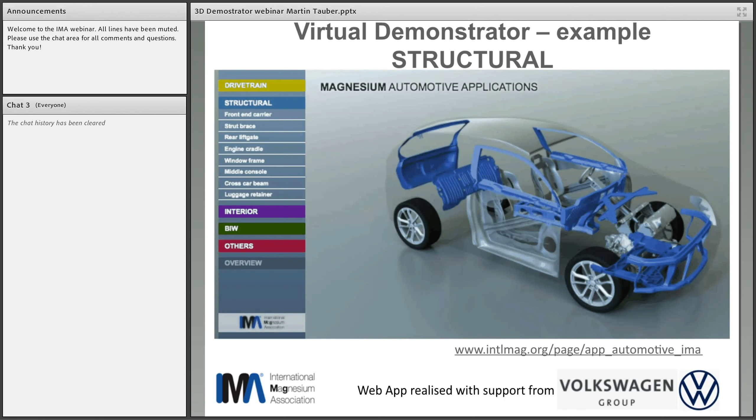And then you can click on every part, and we can show you also an overview list of these 23 selected parts, and they're also dedicated with different colors.

The second element is a part list where you see along, like the technology and also the different alloy used, the weight of the part, the weight advantage or other advantages associated with the part. You see the manufacturer, and if it's dedicated to a particular OEM and a particular model, it's also listed there.

Just want to open up also for later for the discussion, and before we conclude to the panel, a little bit of an outlook. So we all know that magnesium has significant weight advantages against aluminium, but also against advanced high-strength steel.

We currently have, according to a study from the IMA, about 4 to 5 average kilos of magnesium in a car in the European fleet. The American fleet has a little bit more average weight. In our study we calculate the magnesium alloy part plus the magnesium used as an alloying element for aluminium parts. If you split that up, that's about 3.5 kilos for the magnesium part, and around 1.5 to 2 kilograms of magnesium for the aluminium part.

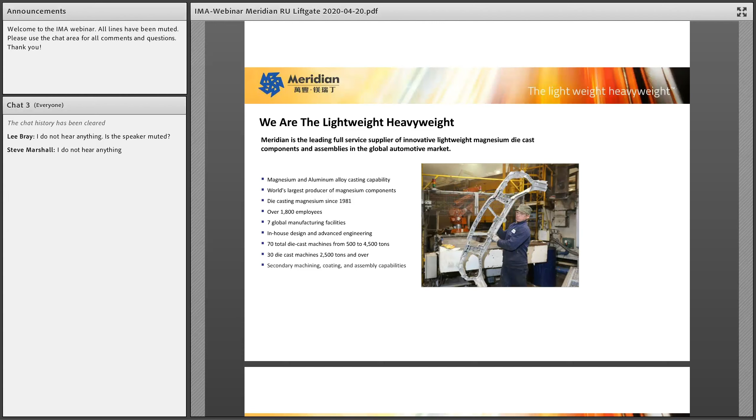As for the products we developed over the last 30 years, a rough overview: we started in 1985 with classical high-pressure die casting parts, transfer cases, then steering column components, pedal brackets, and in 1994 the first cross-car beams. Meanwhile, we're producing cross-car beams in North America, Europe, and Asia, basically globally. We have done seat structures, front of dash, transfer cases, center consoles, front end structures, and especially engine cradles, a very unique part, steering column armature, and the last picture shows a lift gate.

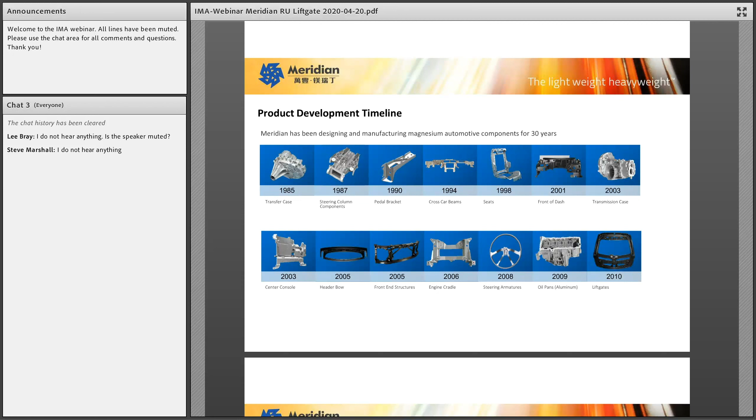We did lift gates, and I will come in more detail to the lift gates now. We developed a lift gate with Fiat Chrysler together, and I'd like to talk about the lift gate today. The vehicle is a Chrysler Pacifica, for which we developed the lift gate.

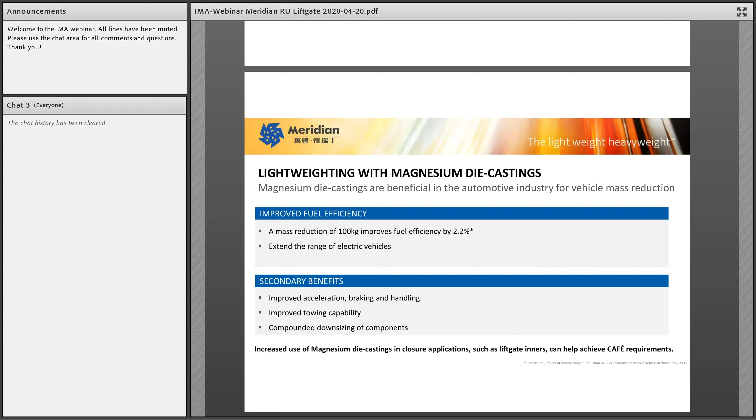A couple of advantages regarding weight saving: mainly on electric vehicles, there's range extension due to the weight reduction, and on combustion engines, fuel economy improves due to the weight reduction. We also see other effects from weight reduction, such as improved acceleration, improved braking, and a very important point, the downsizing of the number of components. I will come back to this specific point later.

Here you see the Pacifica, the Chrysler Pacifica minivan. This lift gate was developed as an aluminium and magnesium casting, so it's like a hybrid, and we saved nearly 10% against the weight saving targets we got from our customer.

The next point is a more detailed picture of the lift gate. The black part you see is the magnesium die casting, and the silver parts are the aluminium parts. In the middle area you see the wiper reinforcement, and on the outside the outer lower skin and the outer upper skin. Important for this part is the high volume production, over 250,000 vehicles a year.

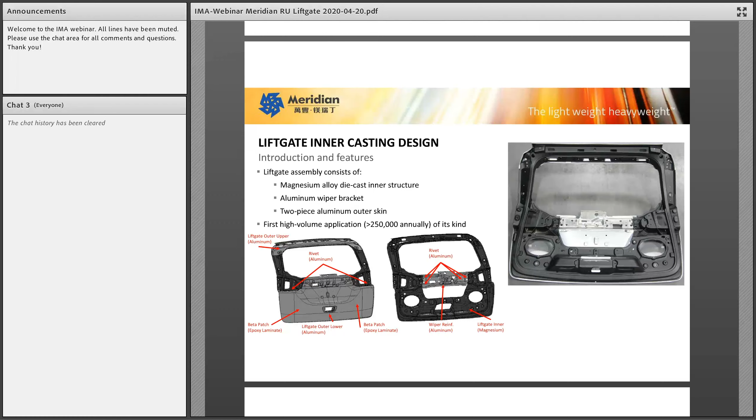On this page you can only see the magnesium die casting parts, just to get an impression of the size. It has a width of 1.4 meters and a height of 1.2 meters, a weight of 6.9 kilograms, and we are using a magnesium alloy AM60 due to the required elongation, strength, and castability. Castability is very important here due to the size of the part. The overall wall thickness is 2.3 millimeters. In smaller areas where the latches and hinges are attached, and attachment points to other components, we have a thicker wall thickness, but mainly we are working with a very thin 2.3 millimeters considering the size of the component.

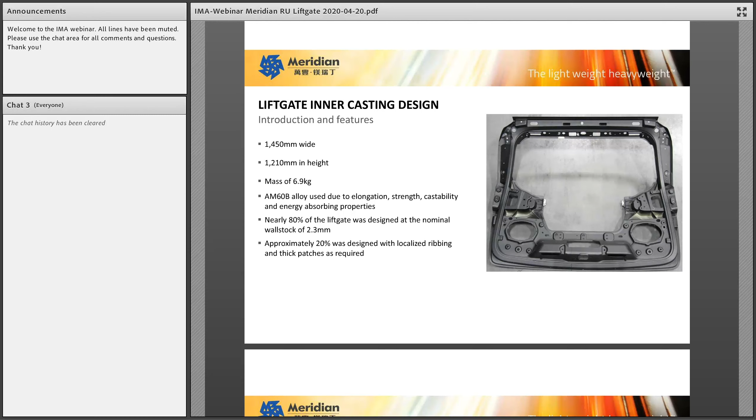On the right side you see the previous generation, which is what I mentioned at the beginning. The previous generation combined several stampings that were welded and clinched together, and we reduced this number of components to one large die casting plus the aluminum reinforcement, down from 7 in the past. There were 7 steel stampings as well as plastic parts to build up the lift gate.

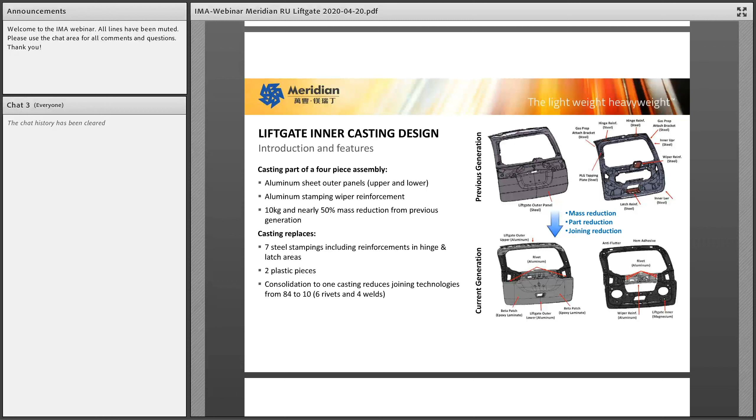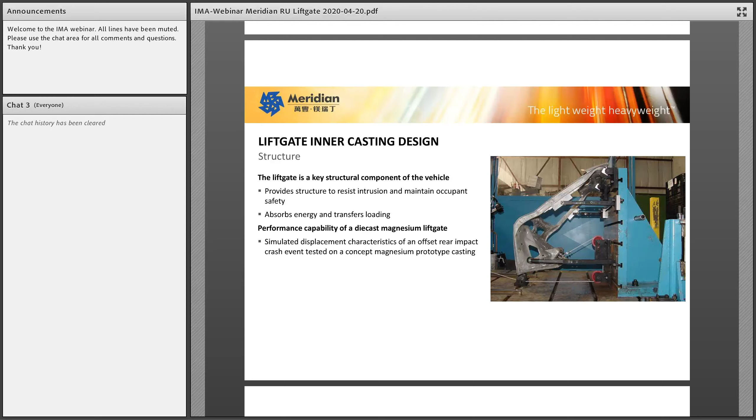On the next page we are talking about simulation and CAE development. We usually work with topology and topometry optimization tools to develop and optimize the ribbing pattern, the position of the ribbing, and the thickness of the ribs. These are very helpful technologies to save development time and avoid tool modifications and tool changes.

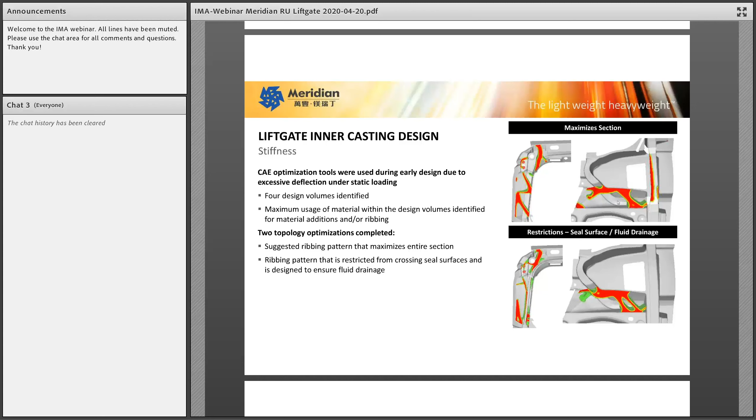One short word about coating. On exterior parts, coating is required, and in this case where we have a wet environment, we are using Alodine pre-coating and powder coating, just these two coating steps. This is probably a bit different to the European process.

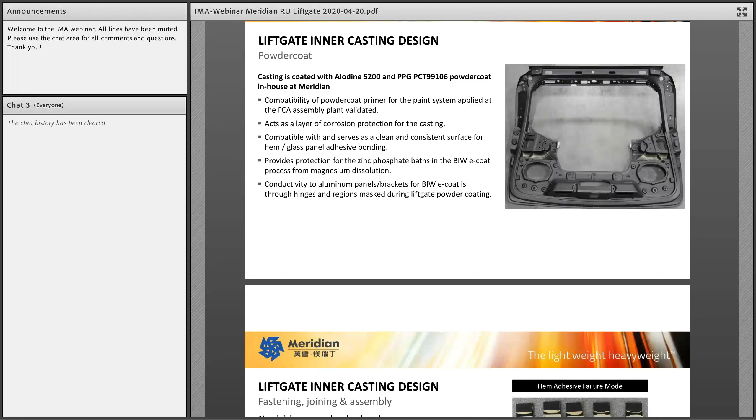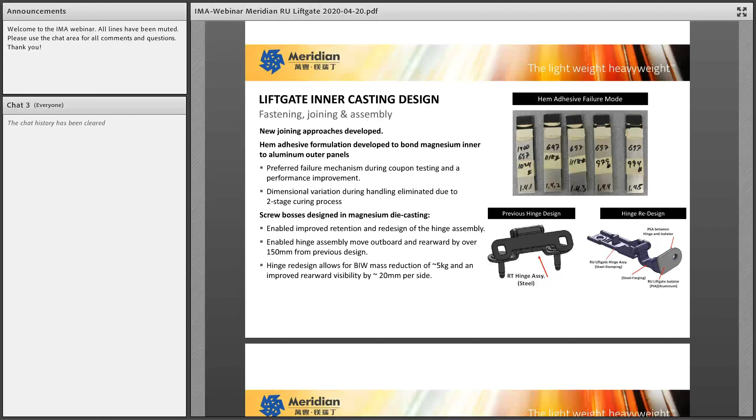On the next picture you see the joining technologies and components, so it's a hinge. In this case, when you have an exterior part, you have to protect against galvanic corrosion, and you have to work with an aluminium layer or an isolator between a steel component and an aluminium or magnesium component if it is in a wet, exterior environment. Otherwise you get galvanic corrosion.

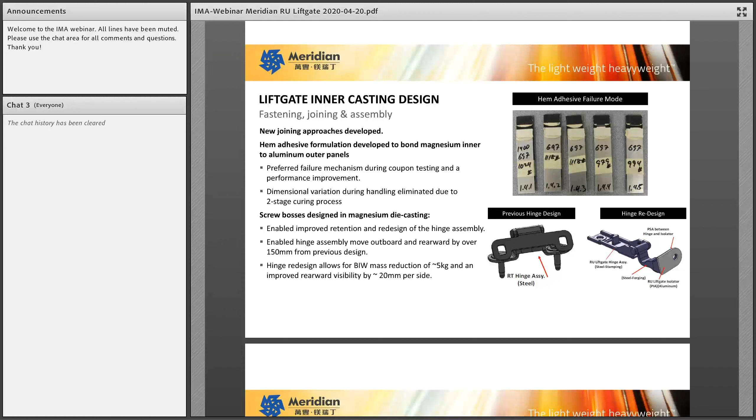May I ask you to round up to already the next presentation? This was my last page, so just to summarize, thank you very much, and this was my contribution to the meeting today.

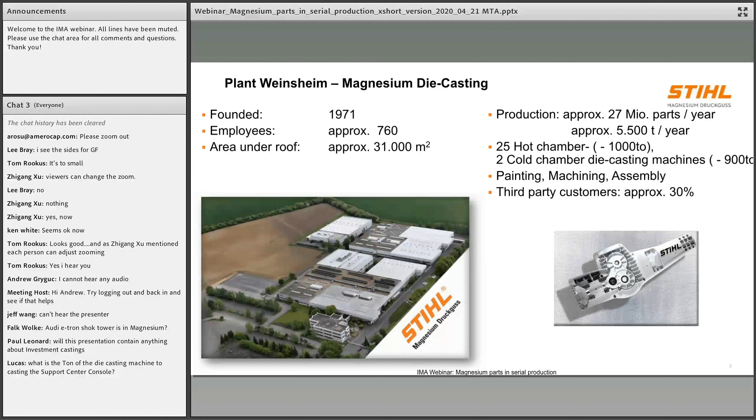Our main customer is the STIHL company itself for the handheld products, but more or less roughly 30% we do our business with third parties like the automotive industry.

We are very proud of our know-how, and we've received several awards for our parts. For example, the strut bar, I will say some words about it later on. It is well designed, it was the best process, and this is a part of 90 centimeters. This part is done by hot chamber technology, and I guess this is unique.

This year we got an additional award, for a piston of a chainsaw, and for me it's really technology beyond the known limits possible with magnesium.

My general message regarding magnesium is that it has a density advantage of approximately 30% versus aluminium, and importantly, you can transfer this into 30% less weight of your part. It is possible. Magnesium is an elementary success factor for innovative lightweight design.

Of course, magnesium needs a design appropriate to the material. You can't copy a plastic or aluminum design. We at STIHL have the know-how.

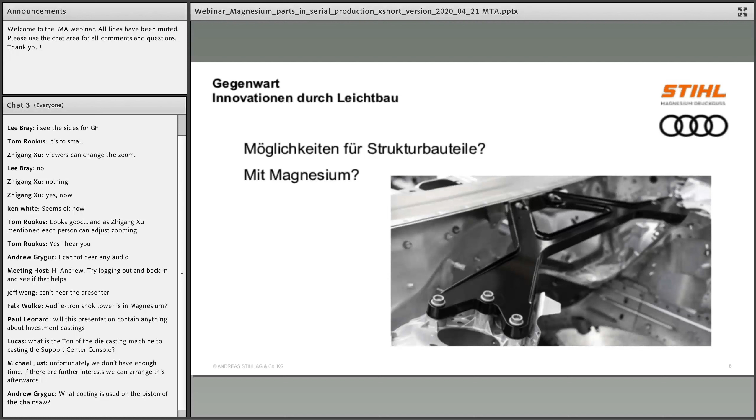Here you can see the history of the Audi A8 strut bar. The part started in the second generation of the strut bar. It's a module, a joint part with aluminium parts, in 2002. In 2009, the next generation was a die casting part, which was cheaper and stiffer, and better for the chassis. And for the last 3 years, we have been producing a magnesium part for the Audi A8 in the 4th generation. This development history shows the potential of magnesium.

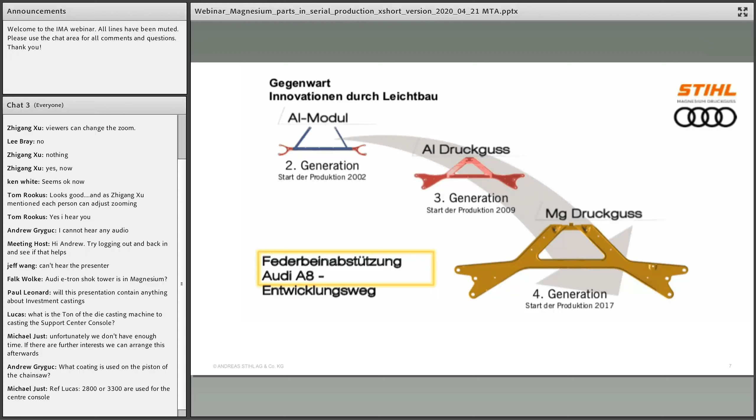As I mentioned with the piston, normally you are working with magnesium up to 120 or 150 degrees, but now we realize serial production for a chainsaw piston working with temperatures up to 350 degrees Celsius, demonstrating opportunities beyond the known limits. Tailored alloys could be your answer if you have special requirements above 120 degrees Celsius - magnesium is able to do it.

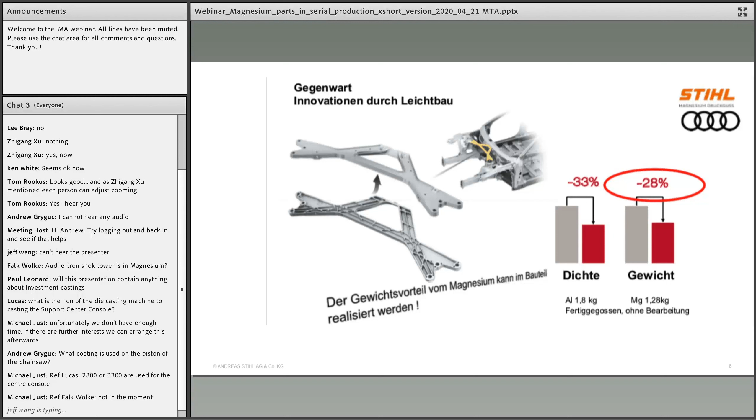Yes, thank you very much, Hartmut, for giving me some time. I will present the castwerk company, and first I would like to tell you something about our mother company.

We are a company from the Hettich Group. At the Hettich Group, you know, from technologies for furniture - so everything which makes your furniture move, it's from Hettich - or even if your kitchen burns down, everything which is still there, that's from Hettich.

We have worldwide 6,600 employees, over half of them in Germany, with figures from 2018 at the bottom. The Hettich Group is located near Herford in Ostwestfalen, Germany, and furthermore we have locations all around the world - 39 locations and over 100 agencies worldwide. Our production sites are mostly in Germany, and in Czech Republic, Spain, USA, China and India. That's the Hettich Group.

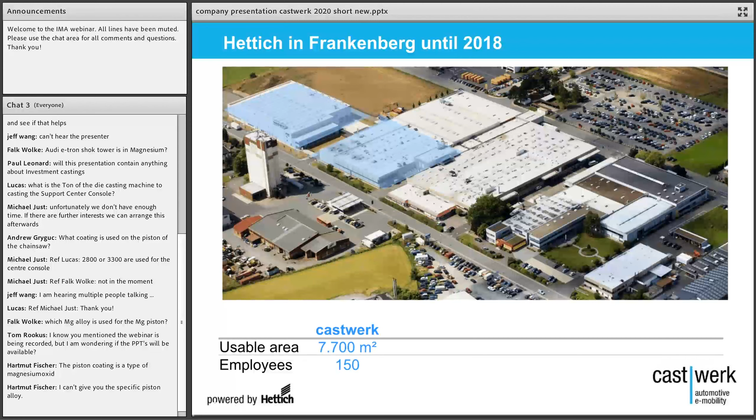And now we come to Hettich in Frankenberg and the castwerk company. Here you see the castwerk area. There are 3 companies within the Hettich Group, and only castwerk produces for automotive and urban mobility. We have an area of 7,700 square meters, with 150 employees in 2018, and now we have 180 employees.

Our vision is that we make the automotive and urban world lighter, and lighter means less consumption and more range. As the most advanced magnesium manufacturing company, we understand the importance of reducing the carbon footprint for our customers.

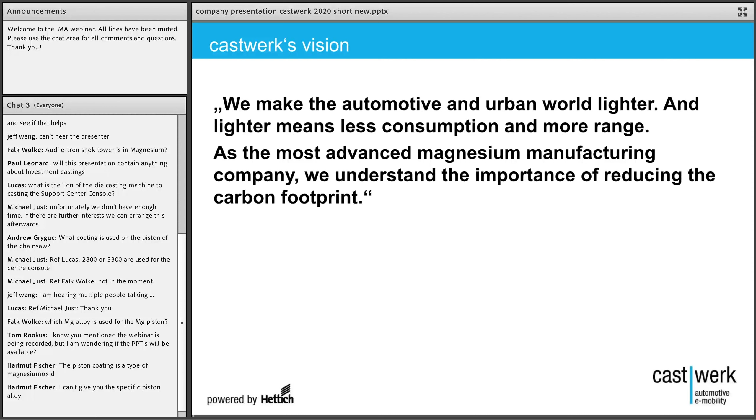We have had a strategic realignment at the beginning of this year. We have 10 years of experience in automotive lightweight products like support plates, clusters for instrumentation, navigation holders, armrests, head-up displays, housings for head-up displays, and dashboard housings. And for the last 4 years, we also have experience in urban mobility, for example housings for engines, for bikes, and also some scooter parts.

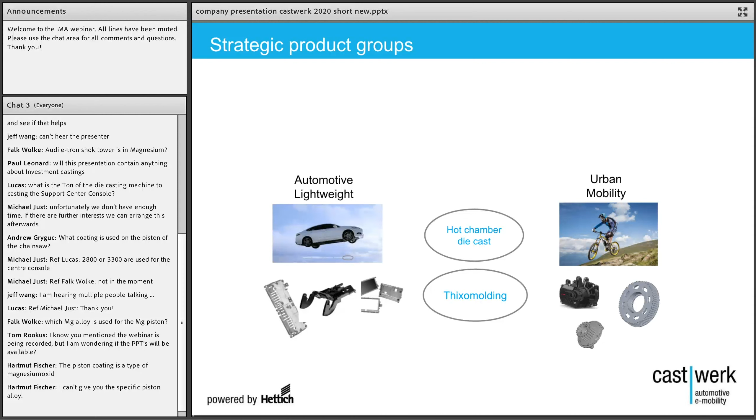The technologies we use are hot chamber die casting and also Thixomolding, the injection molding for magnesium. We only cast the AZ 91D and the AM60.

We currently have 9 magnesium hot chamber die casting machines with clamping force from 200 to 500 tons, and 1 sampling machine where we do our sampling phase so we don't interrupt serial production. We have 2 injection molding machines up to 650 tons from JSW, and 1 magnesium injection molding machine with 1,250 tons clamping force from the company Yizumi, which is currently the world's largest injection molding machine.

The 2nd and 3rd machines will be implemented this year. And we are developing, for the next two years or so, a machine with up to 2,000 tons clamping force.

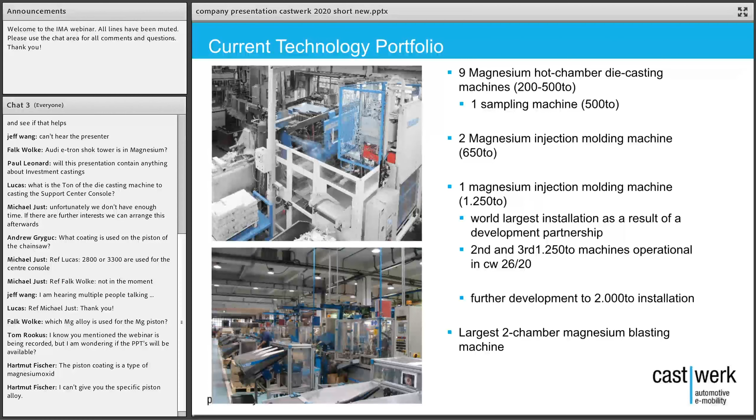Our product groups, here are some bigger pictures for automotive lightweight. Like I said, clusters for instrumentation, navigation holders, head-up display housings, and in the middle you see a gearbox housing for the Daimler T model we deliver here to Brose.

We are actually in the 3rd generation, producing these parts for 10 years, and it's very low noise emission due to the damping properties of magnesium. Here we have no machining, so it's free falling from the tool, and it gets the function that the back door opens with very low noises.

And here we got also first place in the EFM part competition, and also from the IMA, in the last years.

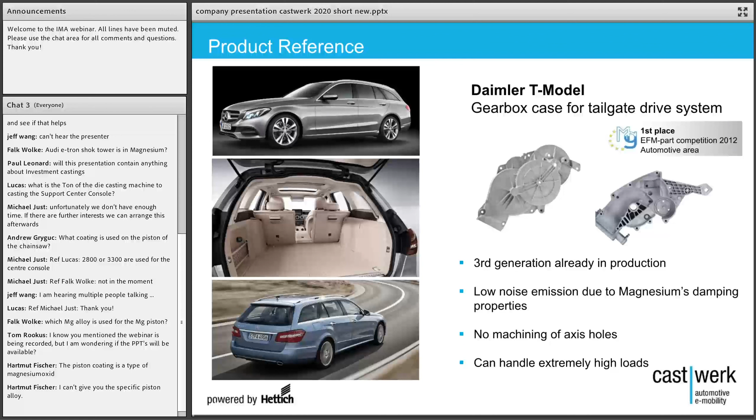Our second product group is urban mobility. Here we have parts like engine housings for the Brose e-bike. The OEM is Specialized and some others, and also the belt run guide, so the force is pushed through a belt on the bike, and where the belt runs through, that's also a magnesium molding product. The scooter you see below also has parts from Castwerk.

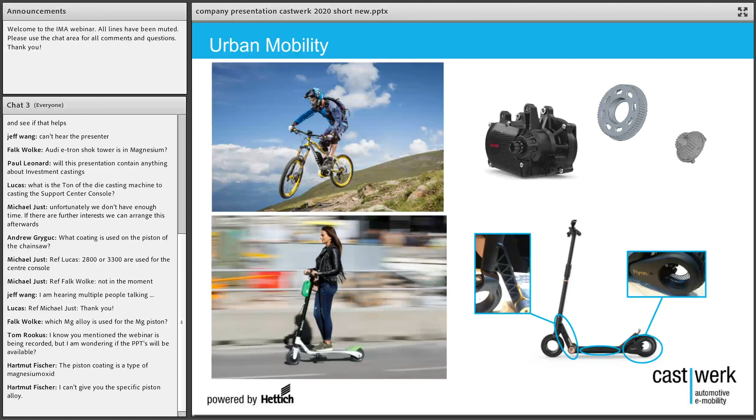That means if we have some demands, and we actually gained some new products and projects for next year, we double our capacity this year in Frankenberg. So we have a starter kit being implemented this year of 2 500 ton hot-chamber machines, 1 650 ton Tixo machine, and also 2 1,250 ton Tixo machines this year. That's only in Frankenberg, so we double our capacity in Germany.

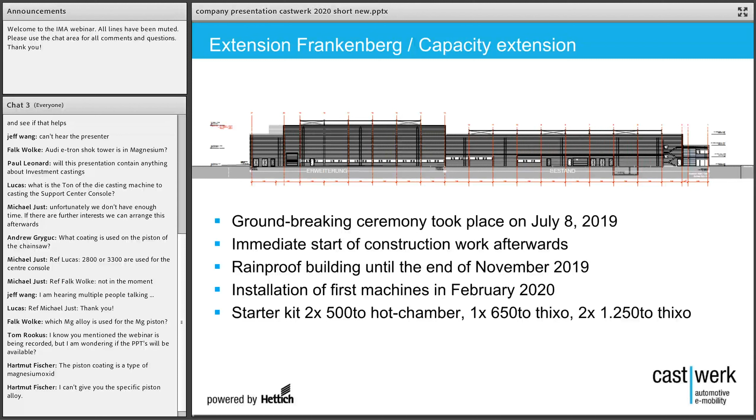There we have the property in Turda, size approximately 185,000 square meters, for the Hettich Group and also for Castwerk 2.

There we plan to implement the process steps of mechanical rework and powder coating, because at the moment we have external partners for that, and in the future we will do that by our own. Also the big Tixo molding machines, up to 2,000 tons, will be set up then in Romania.

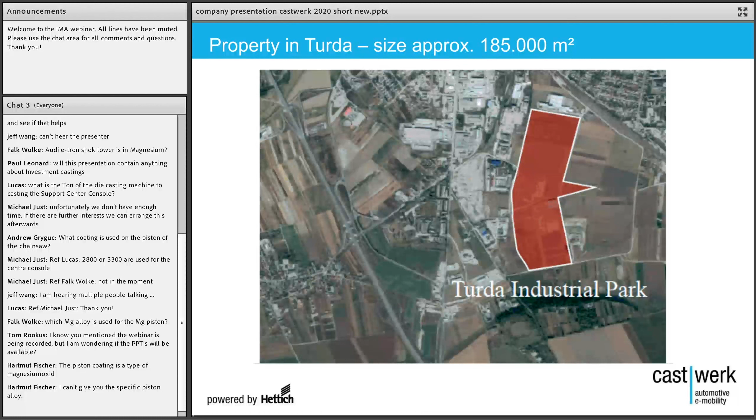So thank you very much, and keep on casting.

Okay, thank you, Jan. That's a very good motto for the industry, keep on casting, especially in the times we are living now. We have about 5 minutes left, and I saw already that most of the questions have been answered, which are now in the chat. So if you have additional questions, please type them in quickly.

I noted one question that was not answered, I think, and it was a little bit confusing. Michael, there was a question about the Audi e-tron shock tower shown - is that magnesium? I'm sure that's not magnesium, isn't it? Yeah, that's right, answered already. At the moment that is completely aluminium, but it's a future discussion if they want to change.